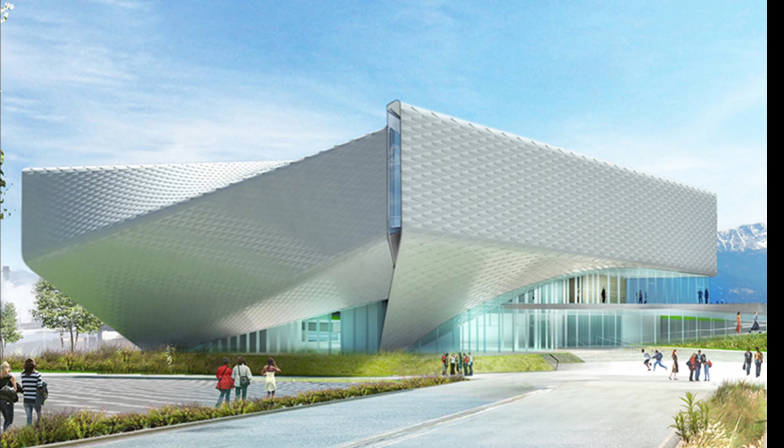As you guys already saw the preview, we are going to be talking about that design because we are going through the Olympics. And even though I am not participating, because I'm right here, I am talking about the museum. And this is part 2, right?

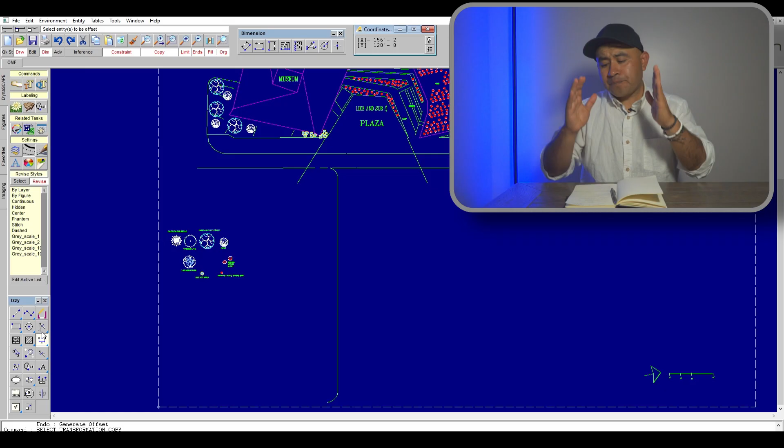We're going to be focusing on the street to the entrance of the museum, and eventually they will build more stuff around this area. So that's one of those things that you probably will see. There's some areas that are a bit more open space, a bit more abandoned. They're not. They're just going to build more stuff in the future. That being said, let's get started with what's going on here.

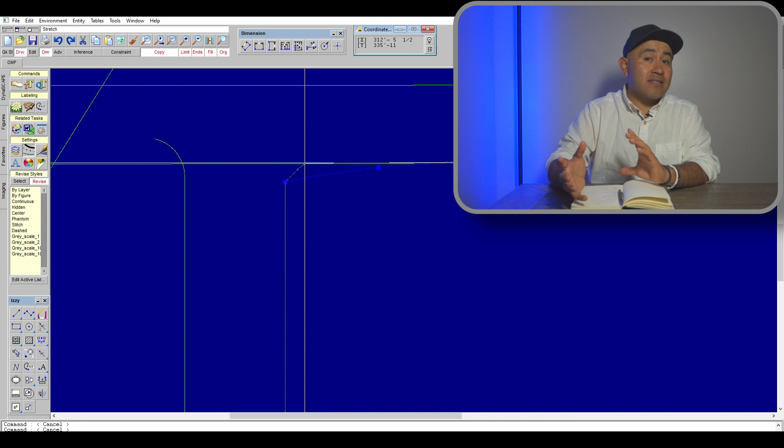So let's talk a little bit about what's going on as far as the design. So the design is going to be similar to what we saw on the actual museum and in that area, which is going to be very modern, very geometrical, a lot of lines going on. And the same goes for the landscape in this section.

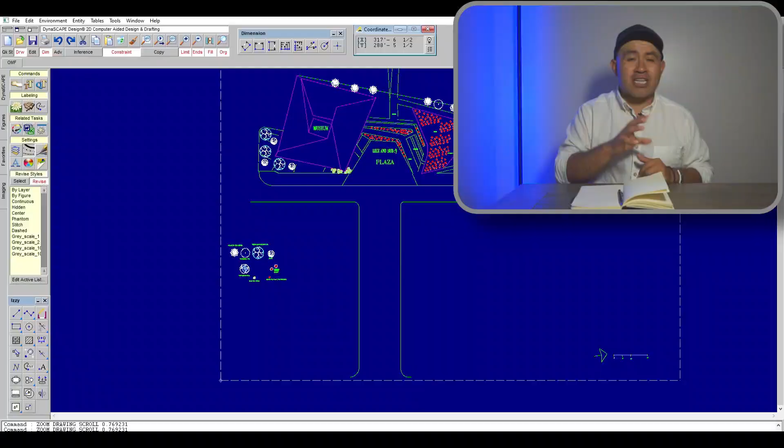So speaking of those areas that would be on the sidewalks, because that's mainly where you have all the landscape, they have some gaps in between of different materials. There's more on the wood mulch and also decorative rock. The decorative rock is going to be the same size as the one that we talked about last time, which is going to be more of a 1.5 inch size of rock, and it will change from that to a bit smaller, maybe 3/4 inch, and it's going to stay on the cool grays and black colors.

Now this is on purpose because they have this sort of theme color going on as far as the overall design of the building, but also the hardscape, which we're going to talk about in just a bit.

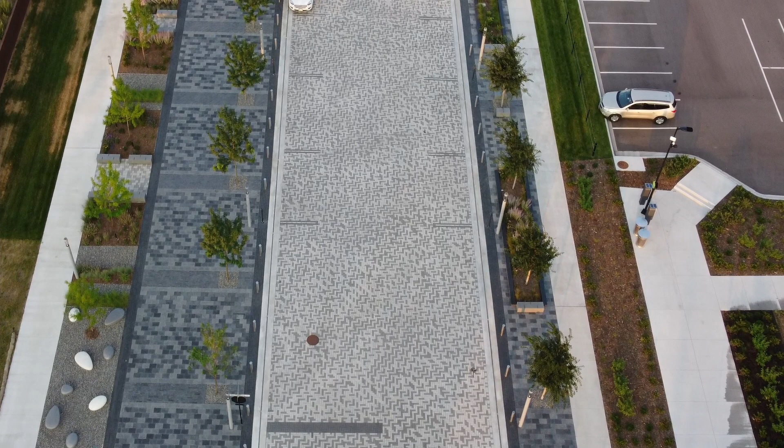So let's talk about the spaces in between those materials. They're only about 3 to 4 feet, and it does change a little bit in some of those areas, specifically talking about some of the rocks versus some of the wood mulch. So some of them are going to be about 3, some are going to be a bit larger, especially where you have some of those seating areas.

Now, this is going to be one of those things that I want to talk about, but it's going to be kind of hard for you to find those things, those sort of nice and smooth egg-looking type of seating. Yeah, you may like them. I actually don't know where those came from, so I might have to kind of look into that.

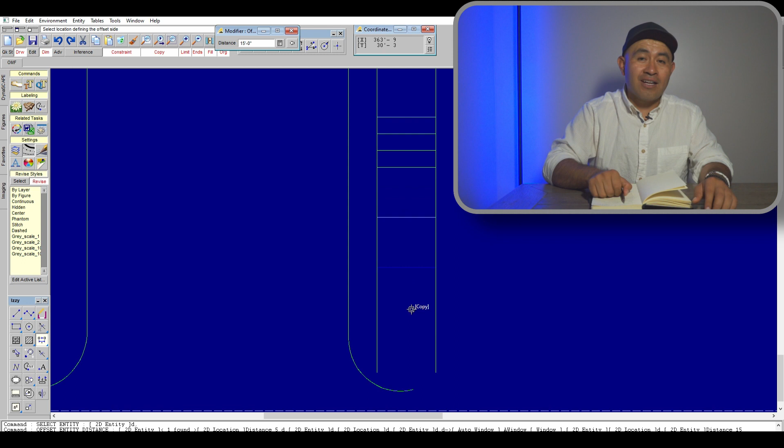So talking about those trees, what I saw were the American lindens, some red oaks, and also some honey locusts, which I like to call natural confetti because their leaves are very small, and it's more or less what it looks like, especially in the fall. Some people really like them, some people don't. So if you are into these trees, maybe you might want to get some of these ones. So that is mostly on the tree side of things. Now let's talk about some of the shrubs that I noticed in the area.

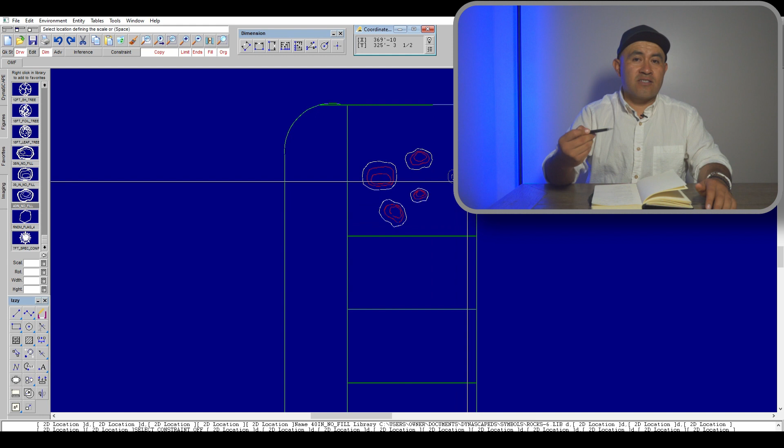There's not a ton of them going on, but the ones that they do use, they use them time and time again, which gives them a lot of that same colors that they're going for. So let's talk a little bit about those and what I saw.

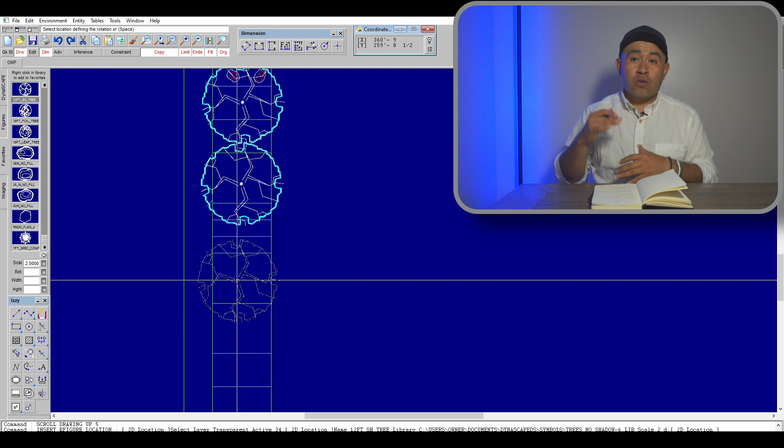So among those, I noticed there's some cotoneasters, some Russian sages, some mugo pines, and those are going to be little for now because they've been only there for a couple months, so they look kind of small, but those are going to grow quite big, and they are evergreens, so they're going to stay nice and green the whole year once they start to grow. Also some Amsonia that also is gonna look really awesome. So those are some of the shrubs that I noticed in the area.

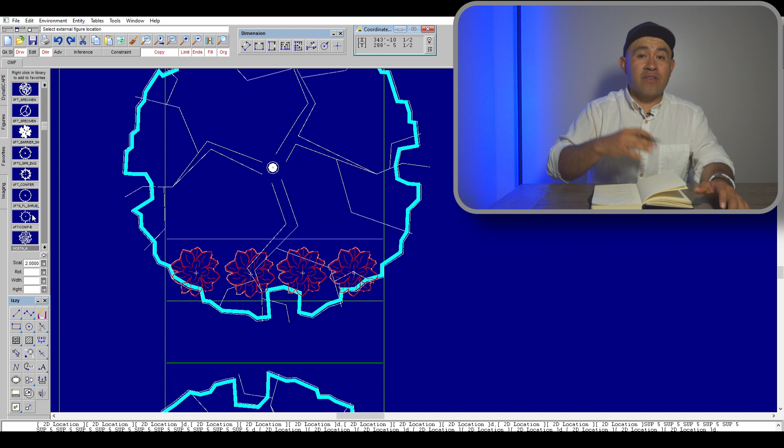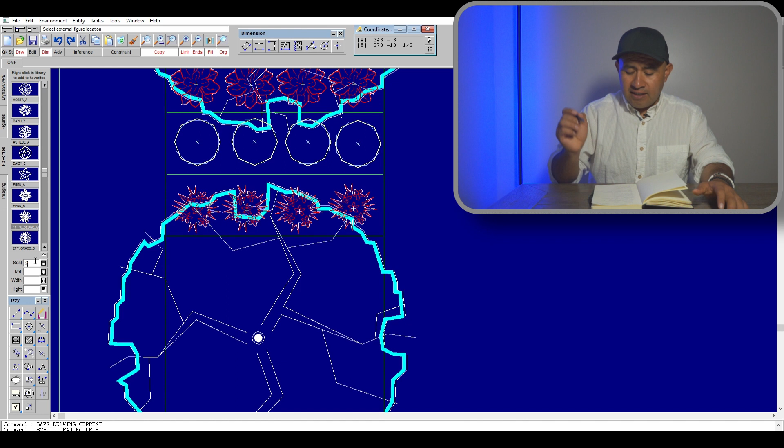Also some of the perennials. Now we talked last time about perennials, more like flowers, in the mix of the native grass they use. In this case, we are going to be talking more about those perennials. So the ones that I noticed were coneflowers, some May Night salvias, some yellow yarrows, some kinnikinnicks, some geraniums, and some Black-eyed Susans. So again, going back to the mixture of them, they did use quite a few coneflowers, and some of those will have different colors in their petals. So maybe something that you may want to use in your landscape. I think they're great. I really like them.

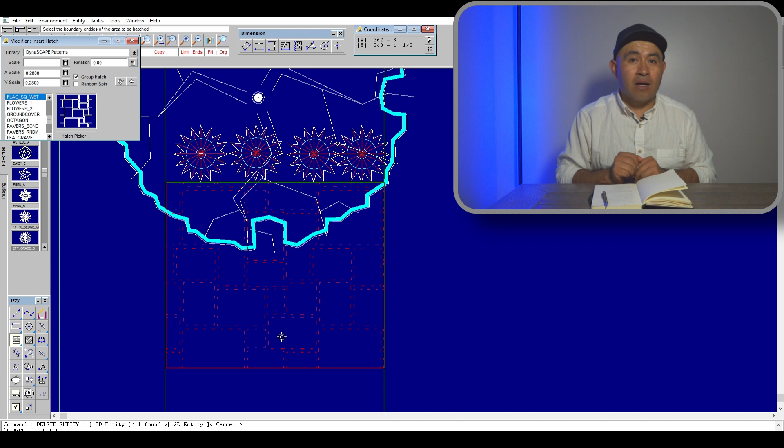The same goes for the kinnikinnicks. Now those are on the broadleaf evergreen side of things, but they're gonna stay kind of low to the ground versus other types in this style. But if you want to use them, I actually do like those as well. It's a great combination to have a little bit of evergreen, and it will depend on where you are in your elevation. They generally like to be kind of on the low part, and they tend to like more shade. So if you happen to have those conditions, maybe a good idea for you to use those.

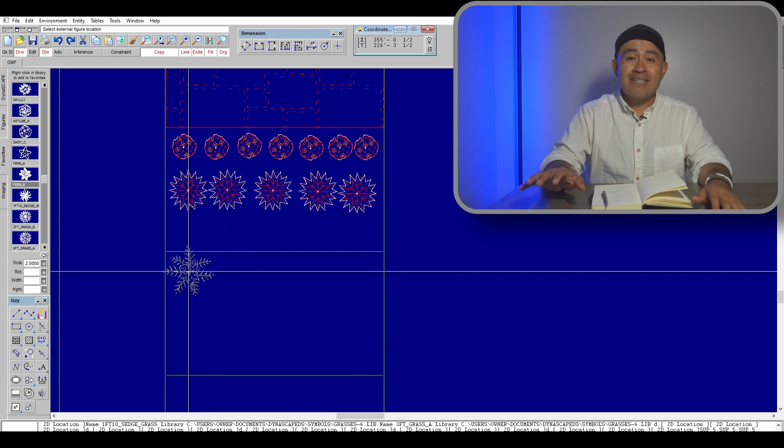So that's going to be on those areas, but at the same time, there are some ornamental grasses in the area, and there's going to be plenty that you can use, and it's going to depend on your colors or the ones that you prefer, the height of them, how wide you want them to grow, also how much space you have. But the ones that I noticed over here were the grama grasses, the blue stem, Korean feather reed, and switch grasses. So there's a little bit of color, different sizes, even the blades themselves, how thick they are. Really cool stuff going on here.

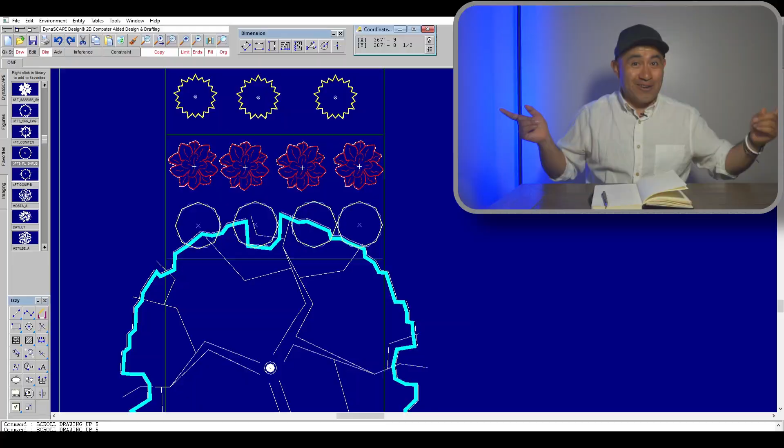So again, I'm gonna show some pictures somewhere in this area. I don't know. Right here, right? That way you guys can see what they look like. Going back to what is currently in this area.

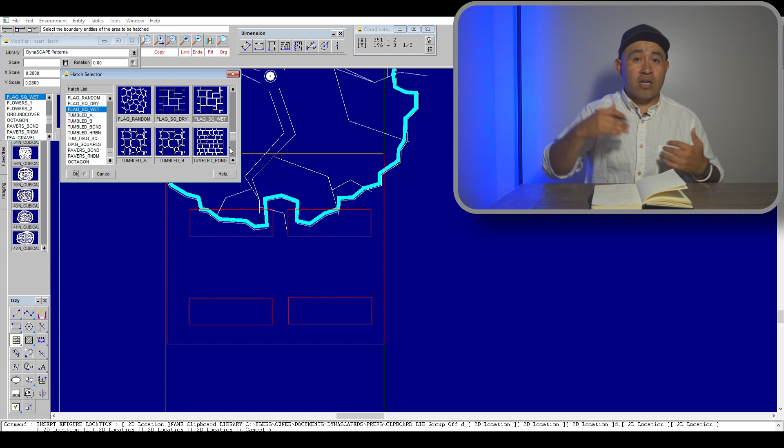And at the same time, on the sides, you do have some rolled sod, and that's more specific to the area. Depending on where you are, you may want to use it, especially if you're in the area of Colorado, say the cities of Colorado Springs, Denver, Castle Rock, a little bit more north, Boulder. You have Greeley, you have Fort Collins, and the list goes on and on. Again, depends on where you are. You may want to switch up the grass, especially if you can't have this type of grass where you are. But Pikes Peak Blue is kind of what they're working with in this area. So that's going to be mostly the plants, the trees, all of that good stuff.

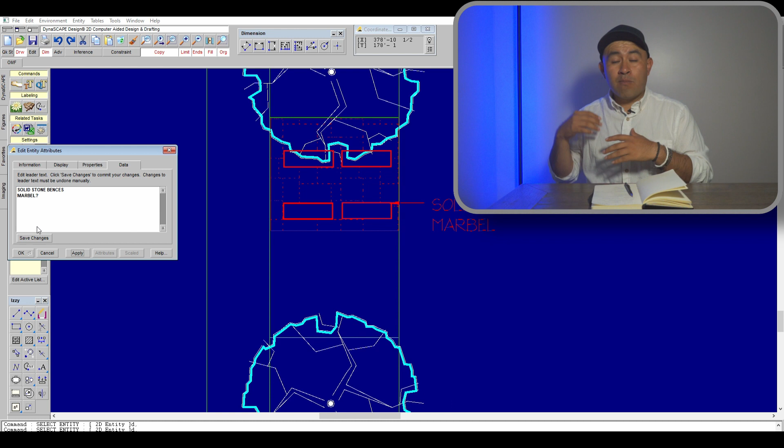Now let's talk a little bit about the hardscape, which I sort of talked about last time, and I'm not going to go into too much detail because there is quite a bit of talk about this. So let's talk about the hardscape, specifically the pavers in the area where most people are going to walk and or drive on top. Now this, as I mentioned before, is pavers, and the style that they were put together is the herringbone style, which looks more like a Z or an L.

Kind of goes like this and kind of goes up like that. I'll put a picture somewhere here, that way you guys can see it. But this is a design that definitely helps with the weight that you put on top of it. You know, the closer they are, the better they are to kind of keep it in place so nothing moves.

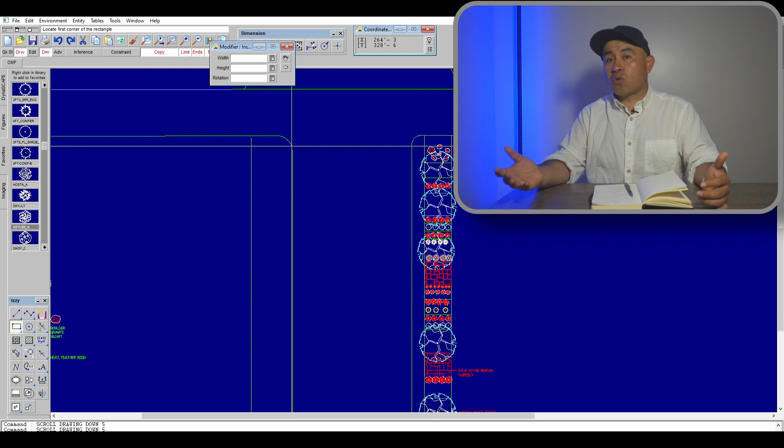Now, that being said, pavers are designed for them to shift with weight as opposed to concrete, where concrete is very solid, rigid, and if it gets either too cold or too hot, it'll expand and potentially crack. Pavers are meant for that area where they can move with the soil if it happens to need it, right?

But at the same time, you definitely want to have the right materials, especially for the weight or the traffic that you're going to be having in those areas. So for that reason, they chose this, which I think looks great. But at the same time, if you notice from the footage, they use different colors. Not only colors, but also finishes.

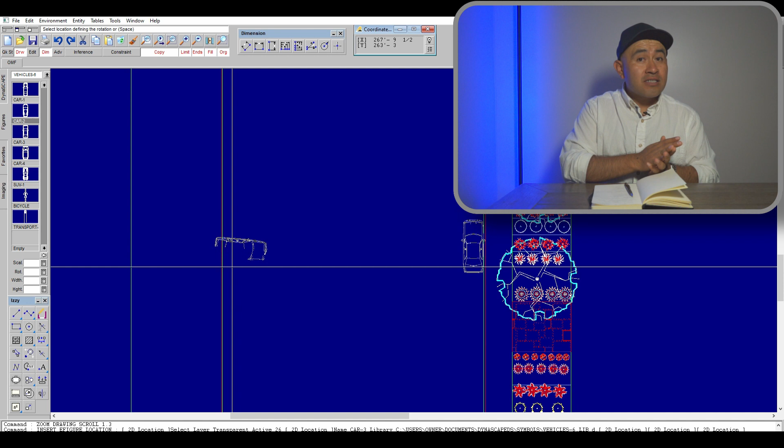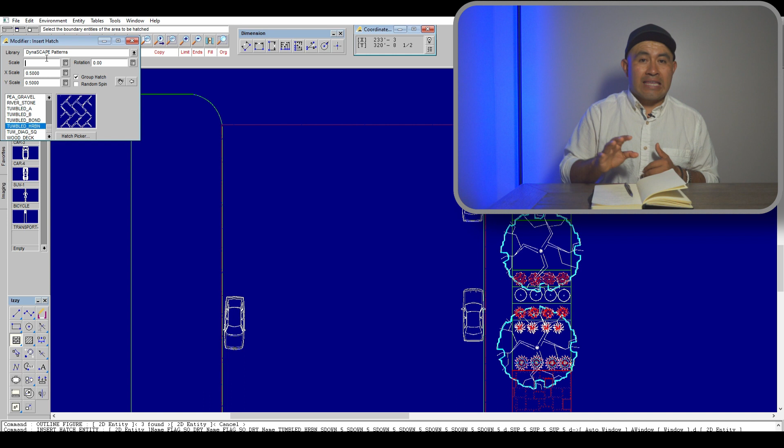So here are some of the ones that I noticed. There's a good chance that I might miss some of them, and those are specific to colors. And if you go to the website, in fact, I will say that the company that made this style of pavers is called Unilock, and I have spoken about them in the past. Great company, by the way. Really good materials, especially if you're thinking of something like this. Very modern, which I know many people like.

So let's talk a little bit about the colors that I noticed there. So as far as those, the ones that I saw were more on the exposed granite types with the ice grays, the steel grays, the midnights, winter marble, among some of those colors.

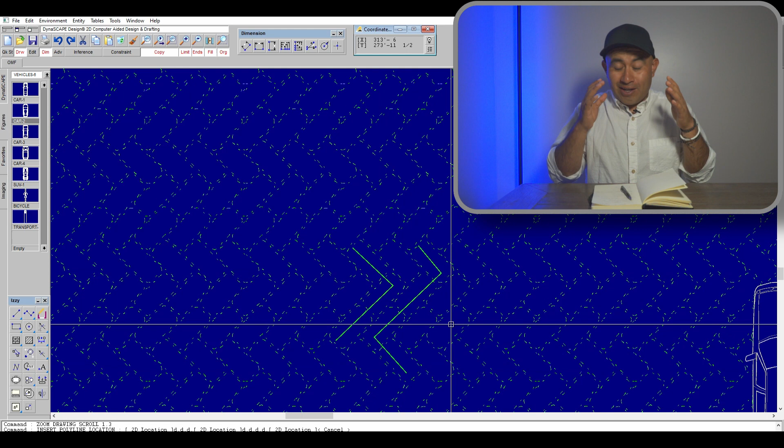So there's quite a few that's going on here, and maybe at first glance they look a little similar, but if you kind of stare down, you'll see there's some lighter grays, darker grays, almost white-like mixed infused in them, and some real dark ones, more like the midnight blacks that you kind of see on the sides, kind of more like on the marble type, more like black marbles in the area.

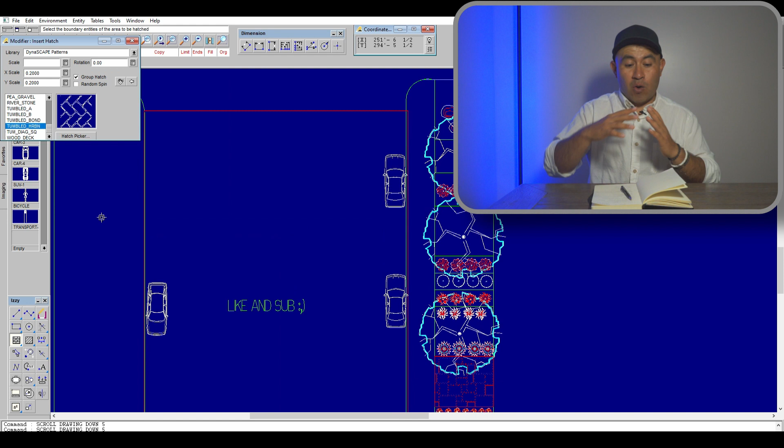Now those, because they're on the side, they're going to have more of the straight lines, but as you move into the area where they're going to be driving, that's where you have the herringbone, which is what I said earlier. Again, those are some of the materials that they use in this area, and of course they also use their concretes here and there in some areas. But this is more or less what they're working with in the area.

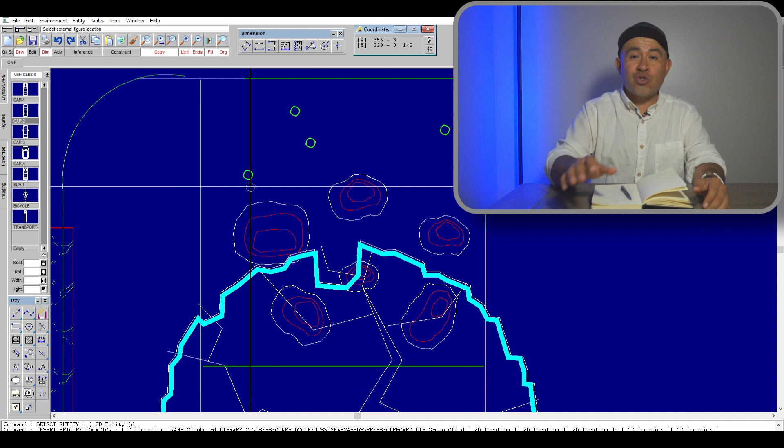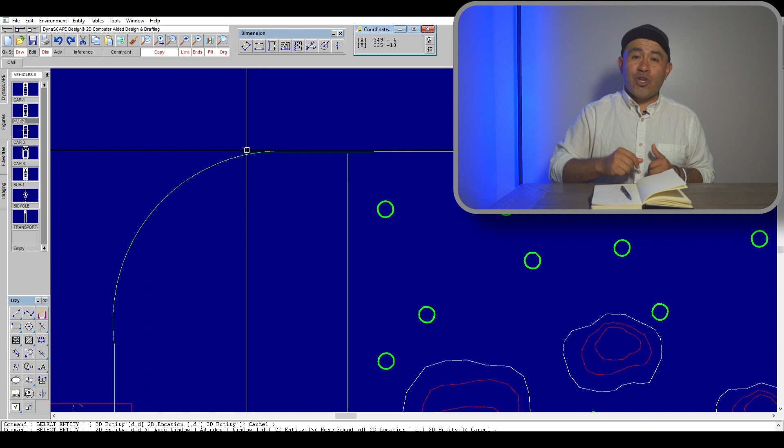As I mentioned, I'm doing this video because of the Olympics. I am not there, but I am here with you guys talking about this area, and I hope that if you haven't gone there already, maybe when you are in Colorado, stop by and check it out. It's about an hour or so south of Denver, give or take, depending on traffic, but it is a very nice area to see. Aside from the museum, you also have Pikes, which is in the background, and other areas that you can visit. But anyways, if you have the time to come and visit, at least to this location, I think you will enjoy it. At least I did.